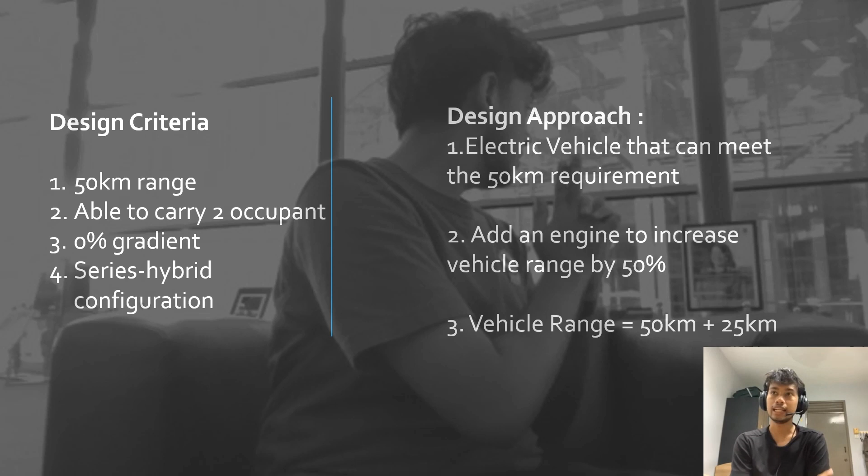So what is our design approach? First, we build an electric vehicle that can meet the 50 km requirement. So this is 100% relying on electric. Then we add an engine to increase the vehicle range by 50%. So the total autonomous range should be 50 km from the electric and 25 km from the engine, and that equates to around 75 km in total range.

Before we start designing, we should have a design concept. So we took an example from Thailand, an electric tuk-tuk conversion project. So we use the parameters there, such as your rolling resistance, your aerodynamic coefficient, and your frontal area, and all the necessary stuff, to calculate our load for this project.

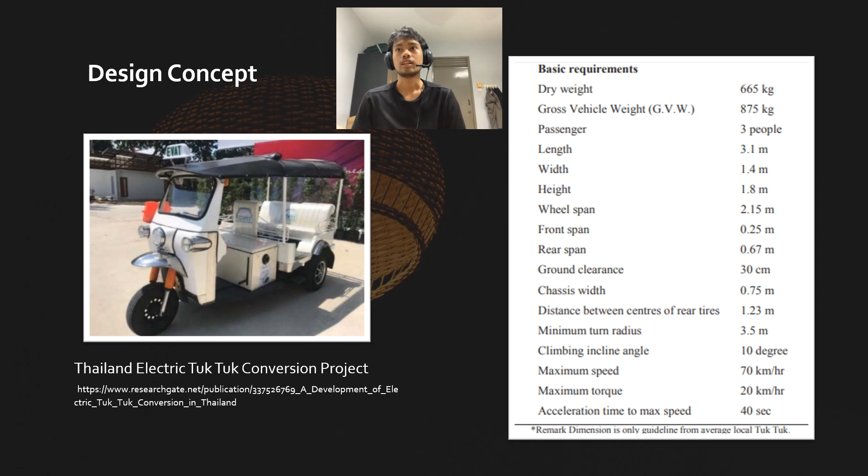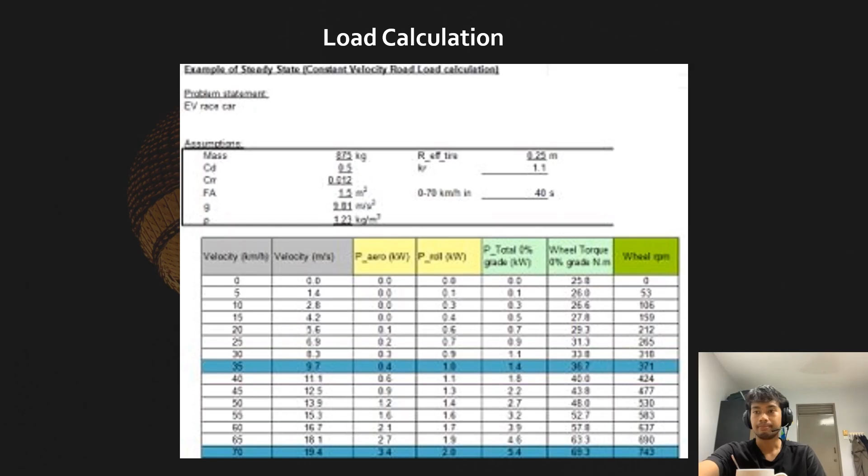What we have here is our steady state road load calculation. So what we have highlighted here is the average speed and the top speed. The average speed being 35 km an hour and the top speed being 70 km an hour. And what is most important here is the peak value. The peak value is what we use for our motor selection.

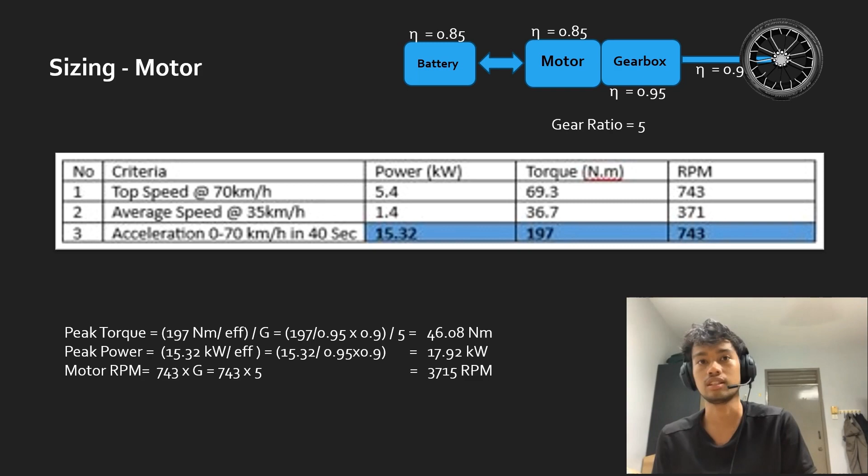And we have calculated here, taking into account the inefficiency and the use of a gear ratio, which is equal to 5. We have chosen this motor, and there will be two motors attached to the two back wheels. And why did we choose this motor? Because it fits all the requirements. The first requirement is the peak torque. If we use two motors, we could get 61 Newton meters of torque, whereas the requirement is only 46.

The second requirement is the peak power. It is able to produce 24.2 kilowatts of power, whereas the requirement is only 17, and the top speed of 3,800 RPM, whereas the requirement is only 3,715, and of course the average torque required at the average speed.

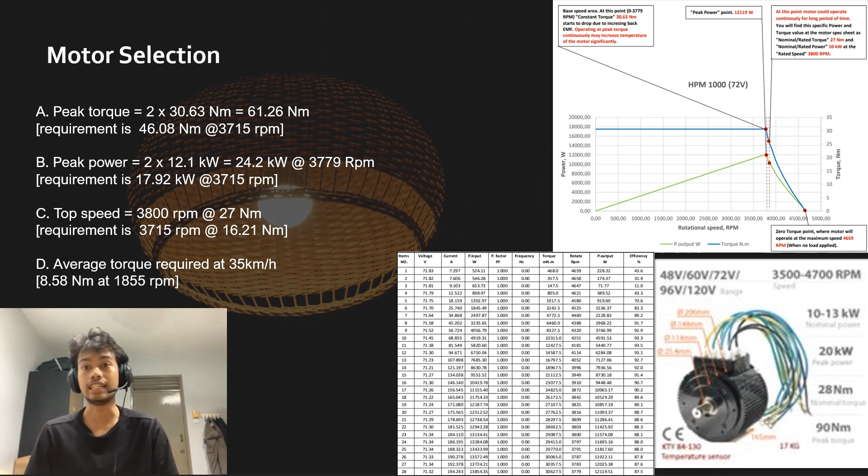And battery sizing. So the objective of this sizing is that it should be able to get us 50 km in range. So taking into account the specification for lithium ion and the road load, we have identified that the battery configuration should be 20 in series and 20 in parallel.

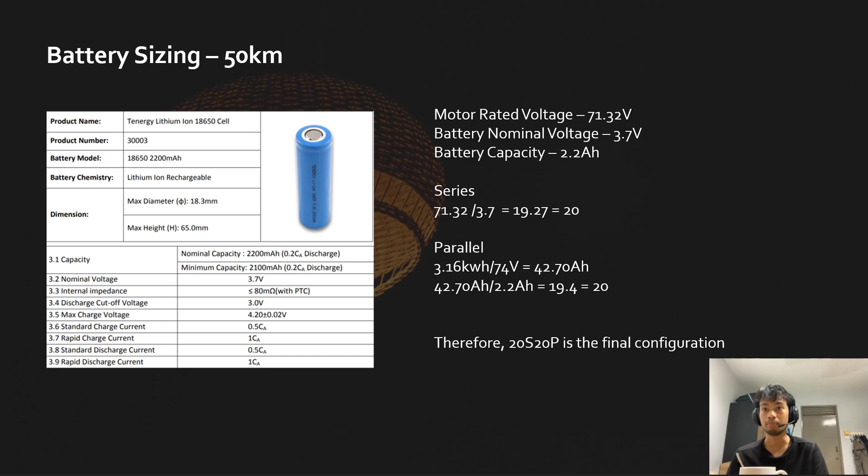As for the engine sizing, the objective here is to increase the vehicle range by 25 km, which is around 50% of the total range. So 50% of the total road load is somewhere around 4.47 kilowatts, and that equates to 4.47 kVA. And we have identified the suitable engine to be used in our project on the right here, which is a Tokai 11 liter 224cc.

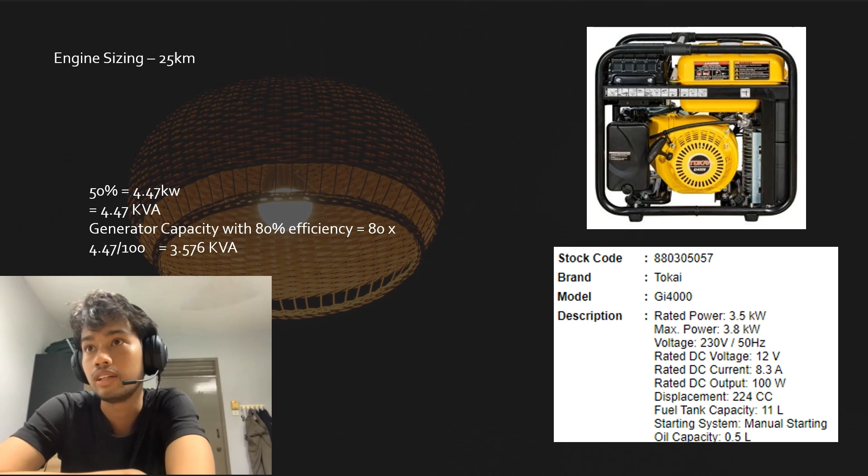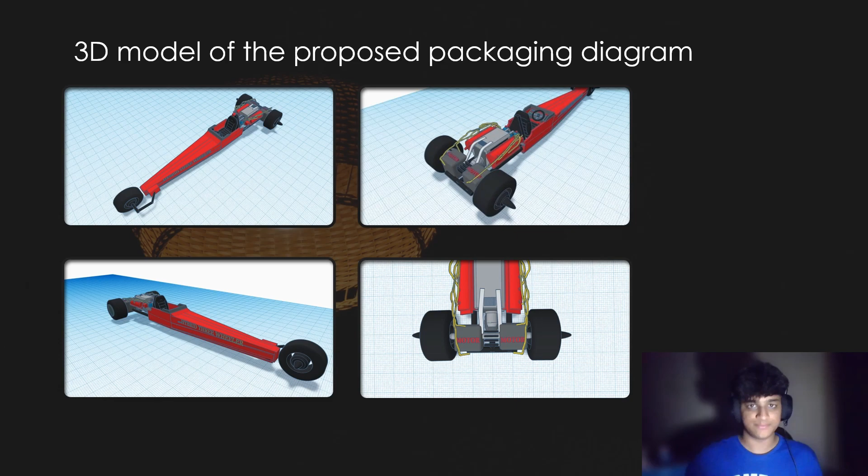So when the simulation stops, our distance is at around 50 kilometers and our battery capacity is 0. So from this we can know that with the battery pack we designed for our hybrid vehicle, it can travel up to 50 kilometers. So now we are gonna do the simulation with the engine also.

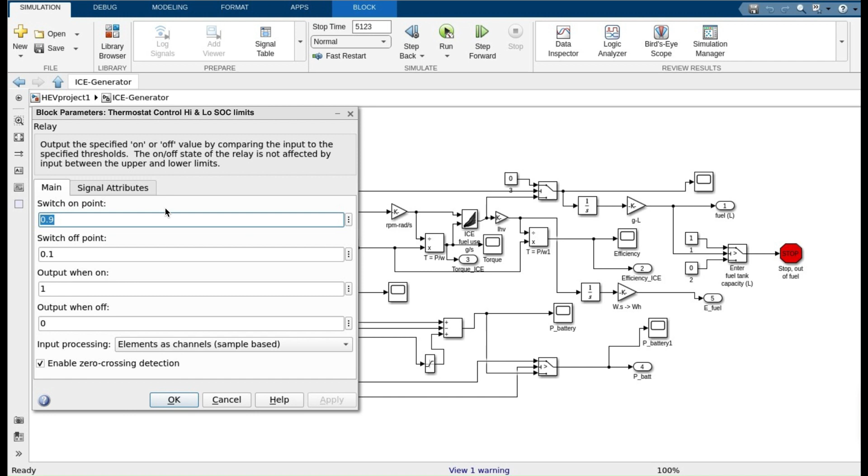So first we are gonna set the thermostat controls. So our switch on point is at 0.9 and switch off point is at 0.1. So we apply this, go back, and we set the time up to 8000. Then we run the simulation again. Now also you can see that as distance is increasing, the battery capacity is decreasing.

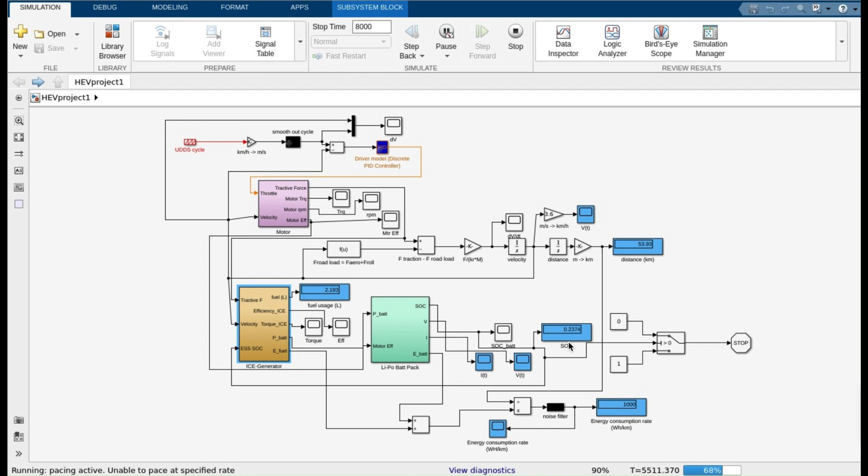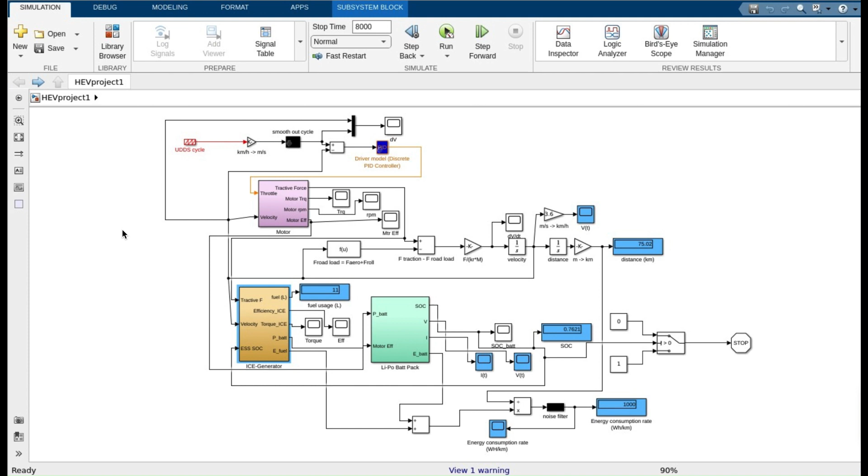As you can see, battery capacity reaches 0 when distance reaches around 50 kilometers and fuel consumption starts increasing. And the simulation stops at 75 kilometers with a fuel consumption of 11 liters. From this we figure that our model gives an extra 25 kilometer range when we use the engine. So that's all for the simulation.